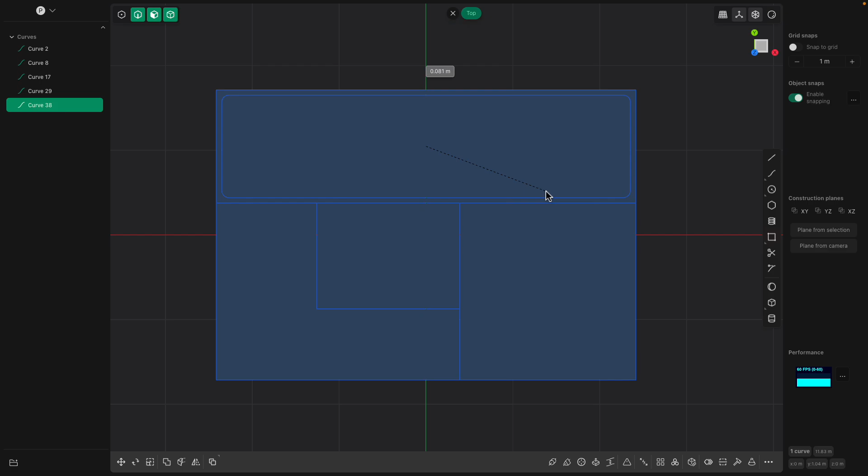For now anyway, select the face. The next thing, the procedure I like to do is usually just O to inset, and then B to bevel. There are many ways to do this, but I think this O and then B for bevel is probably the best way to do it.

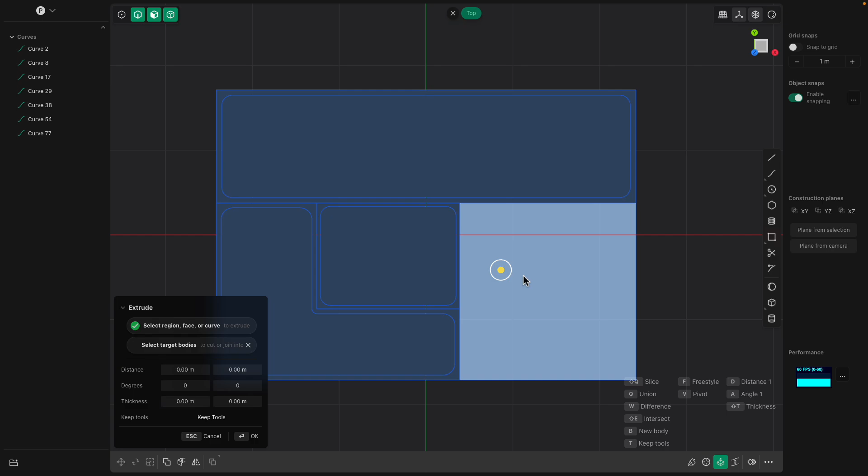There are probably different procedures, but let's try with this for now. So inset and then B for bevel. You can be precise with the bevel to make sure every bevel is the same, but in this case don't worry too much about it - it's just for fun.

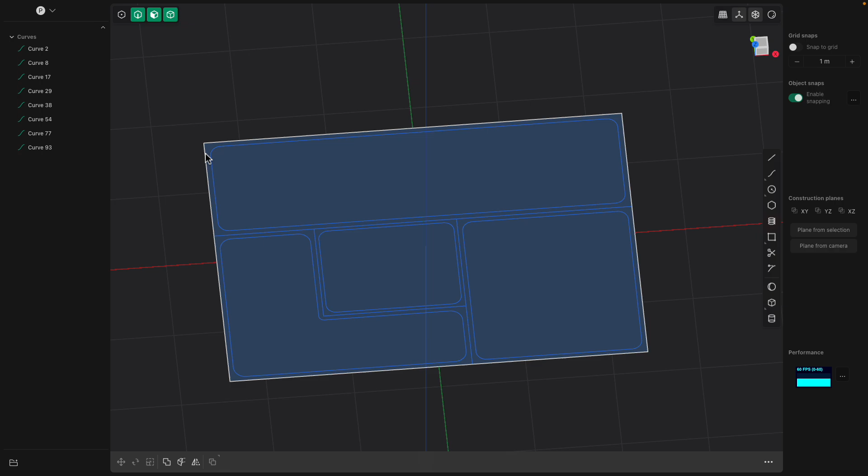I want to show you the procedure because this is kind of like a pretty good therapy - you're thinking of a space and you divide it like a room or like manga panels, and now you have this divider, and you can do funny things with it.

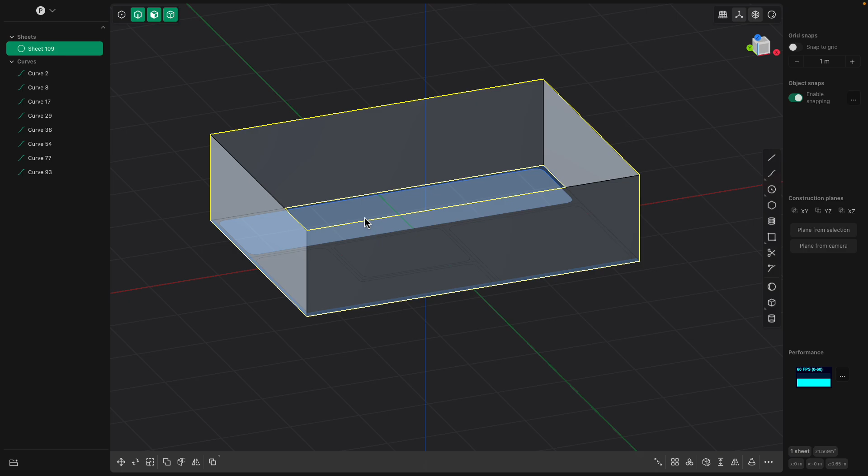You start with this one, the big one, right? Let's do an extrusion, very basic. Now we are creating like a wall, a divider, a safe space for our bento. And this guy is just a sheet - it's nothing, just like a surface.

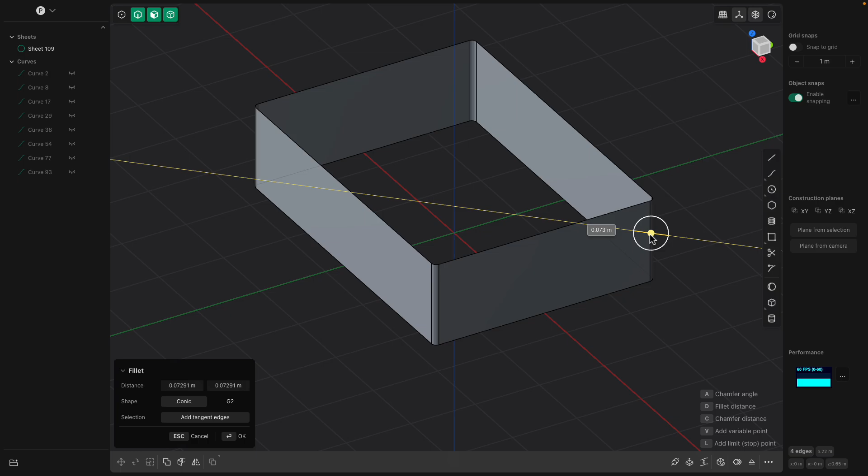That is hollow. So the next thing you want to do probably is make a rounded corner. Not too much, just a little bit, so it looks nice.

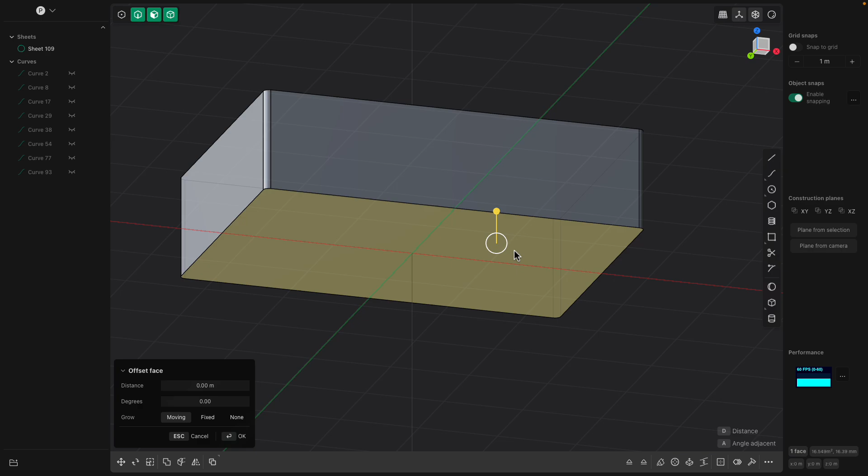And then select the bottom part using option, select, patch the hole, right click. Now it's still a surface. Let's do Control 2, and then you can round this bottom area. Save. It's still not a solid object, so you want to turn off the X-ray.

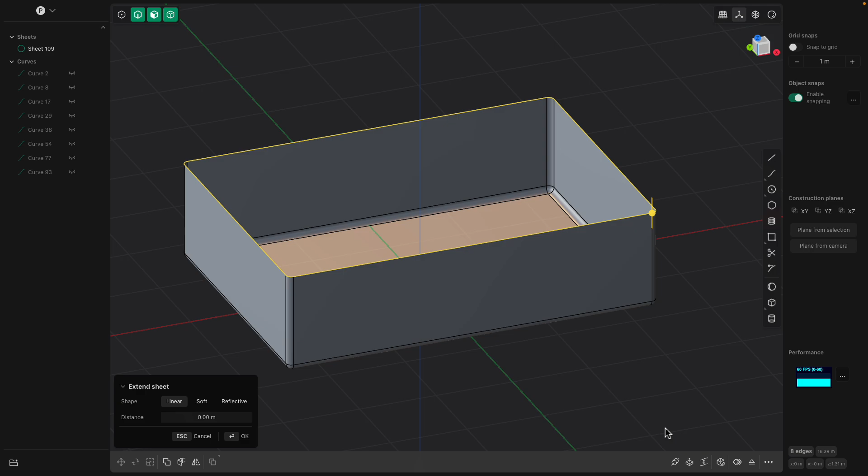I want to select the top part, option click, patch the hole. Now it becomes - the sheet becomes solid. Okay, magically it becomes like that.

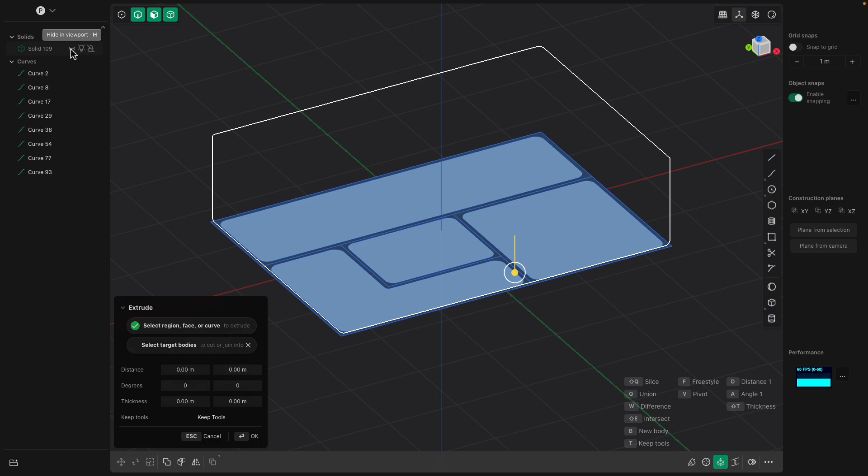Now let's refill all the outlines again. Let's hide the solid object bento. You know what I'm trying to do? We're gonna extrude this. In this case we're gonna make a cut.

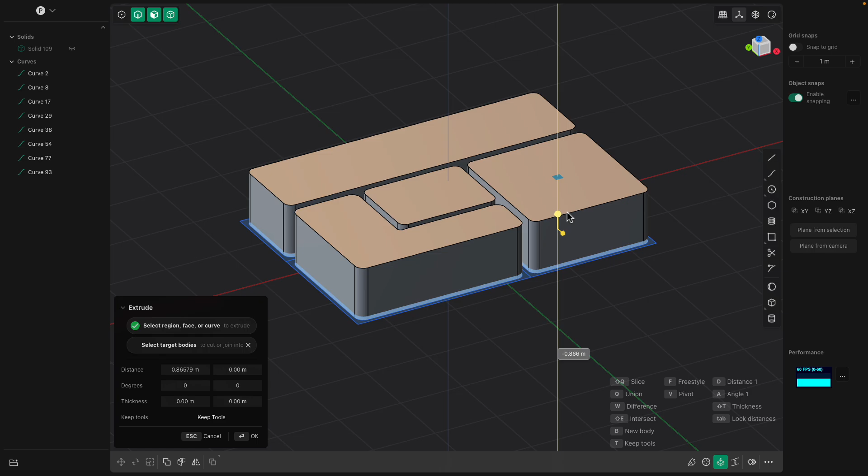Let's just extrude it up for now, and it's gonna be a cutter, so let's delete or hide all the curves. We can keep all the curves. Now we have this bento box and all these cutter objects. So let's adjust this.

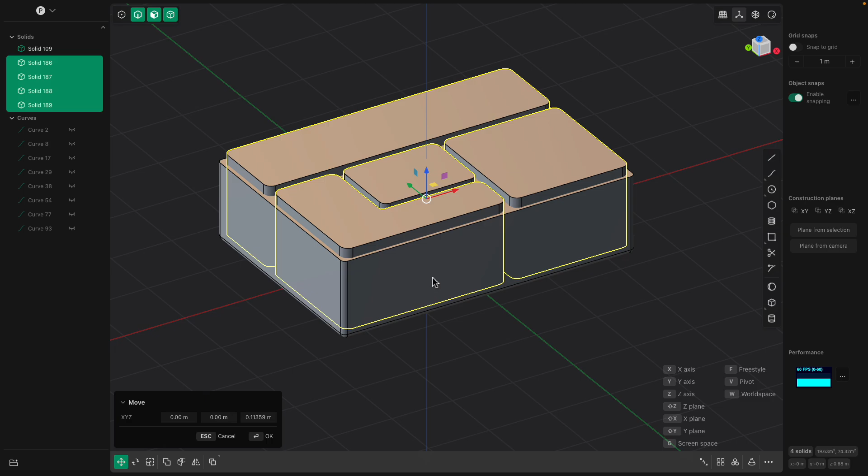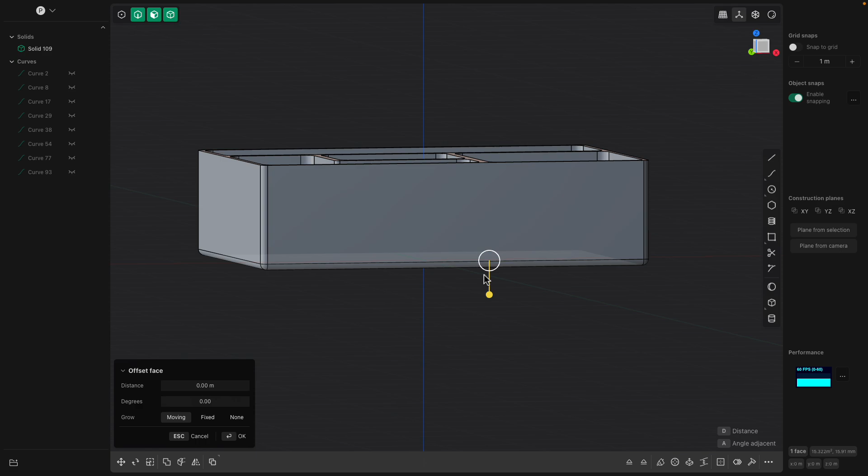Select the big one, select one of this guy, and then Q, and then shift click. So this process seems like a procedure - it's very precise, kind of, right? But it's kind of nice to be able to do this actually. There's a bit of precision, but also you have freedom when you make a cut.

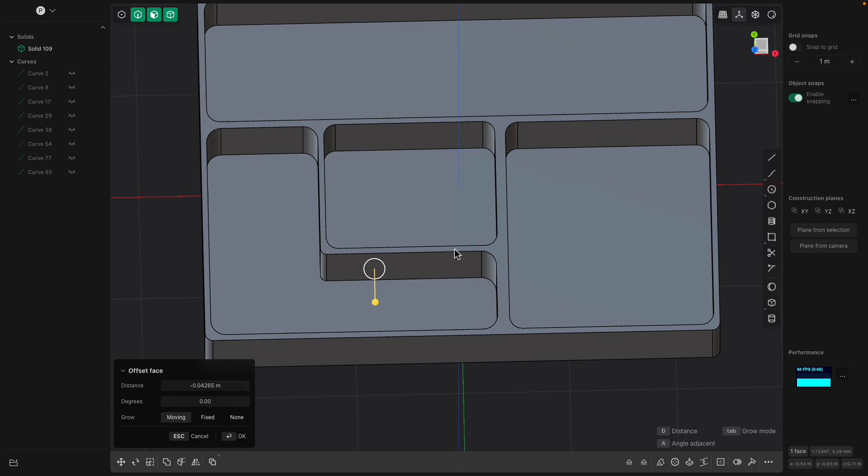And now, if you're unhappy with the thickness, you can push and pull. So this part is almost like a design project, right? Okay, it's kind of nice.

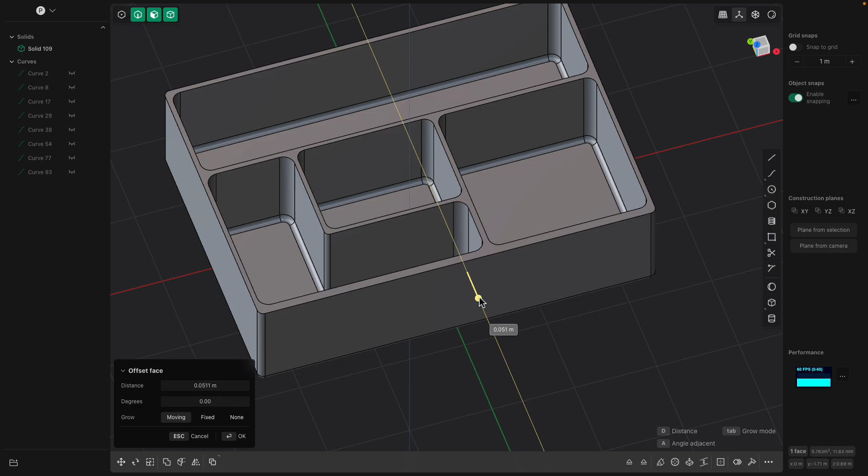Select all the bottom part and then Control 2, make it rounded. That's nice. You might want to round some areas. In this case, I don't know - I like the outer part actually a little bit thicker, so we can still do that.

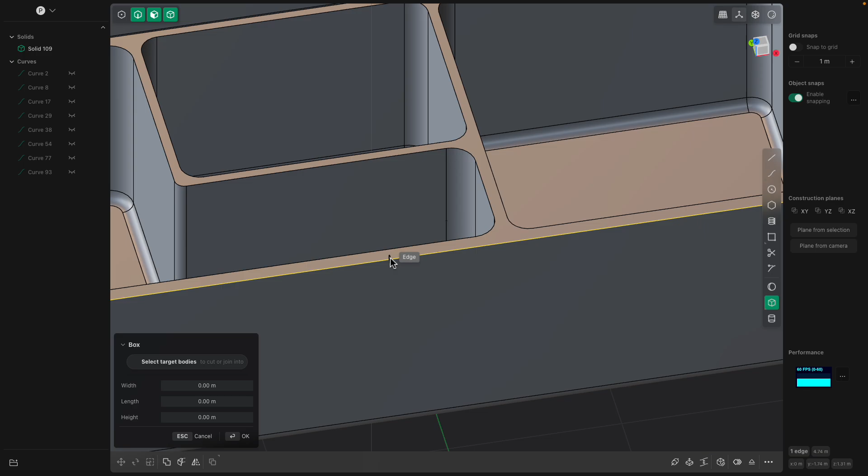Yeah, I think if we want to make the top lid and then we want to make a cut just so we can open the lid, we can actually do that as well. Let's try.

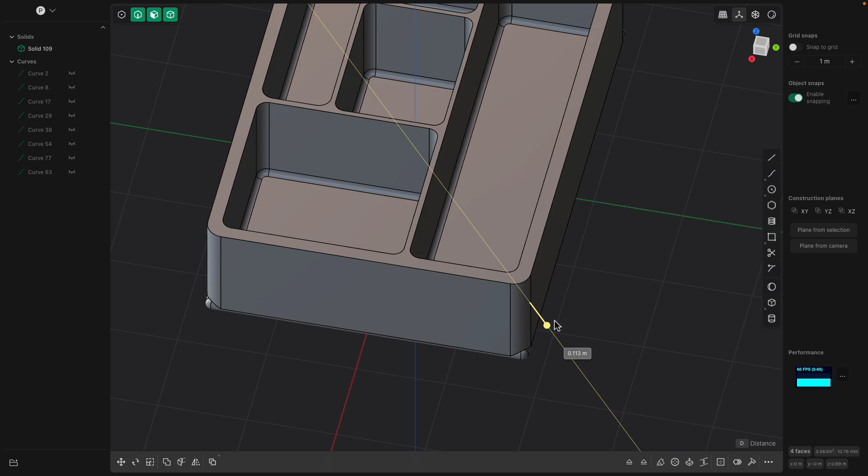So this gets a bit thicker. So we can still have a bit of control, some procedural control. Okay, this part is a bit broken because the bottom part is now like a different entity, sort of.

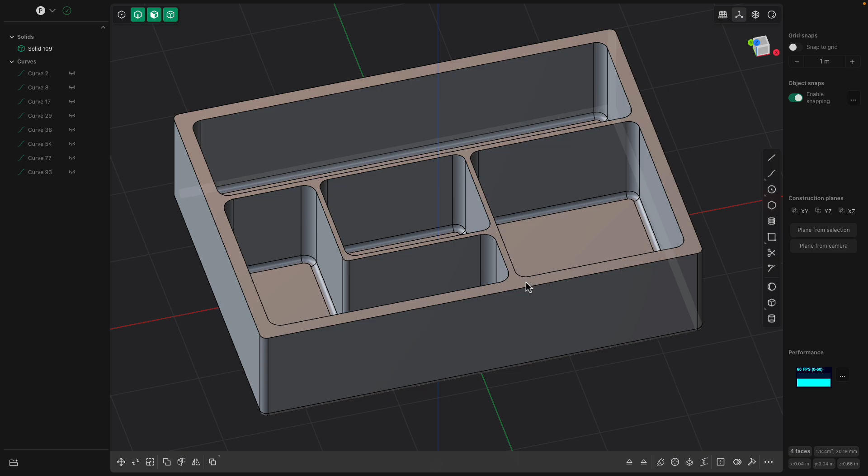Anyhow, what I was talking about is that if you make the top part, it's gonna duplicate the top area. Now we have this curve, and with this curve we can extrude, right? So we have the lid.

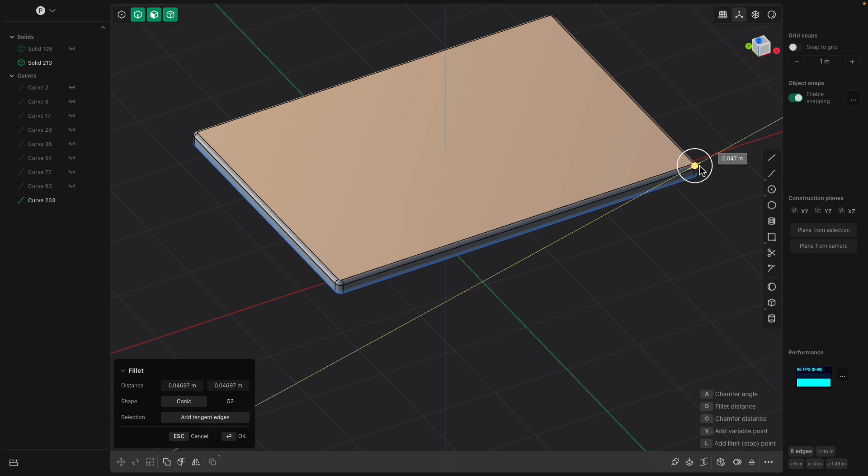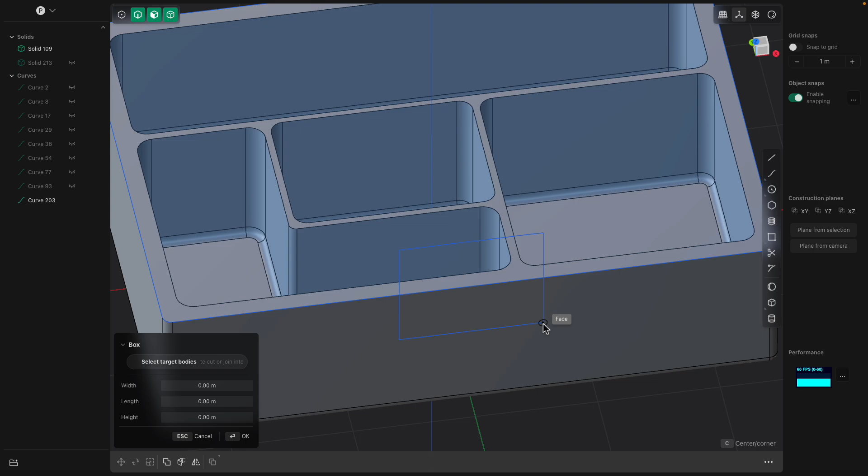Just for experiment, it's gonna be the lid. We want to be able to open the lid, so we need to have a cut, just like the AirPod design the other day. It needs to have that cut in the middle. Type C. This kind of thing.

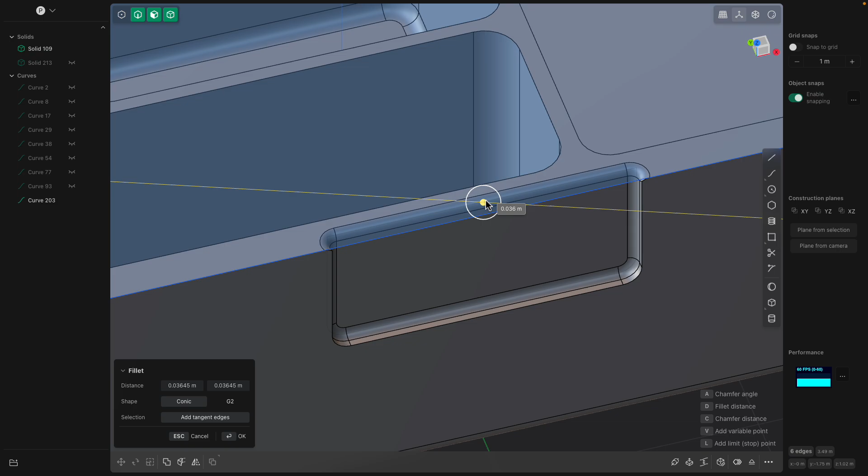Maybe the top part also needs to have the same similar cut, so we can, but at least we can just pull this with our finger to open up the bento.

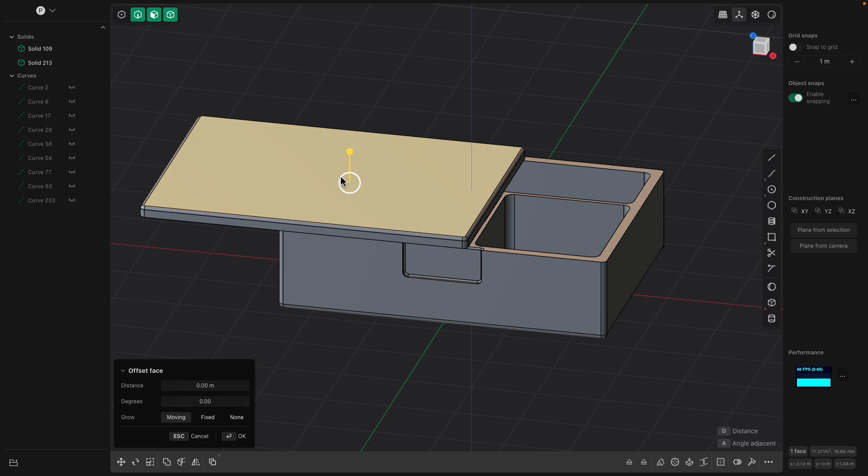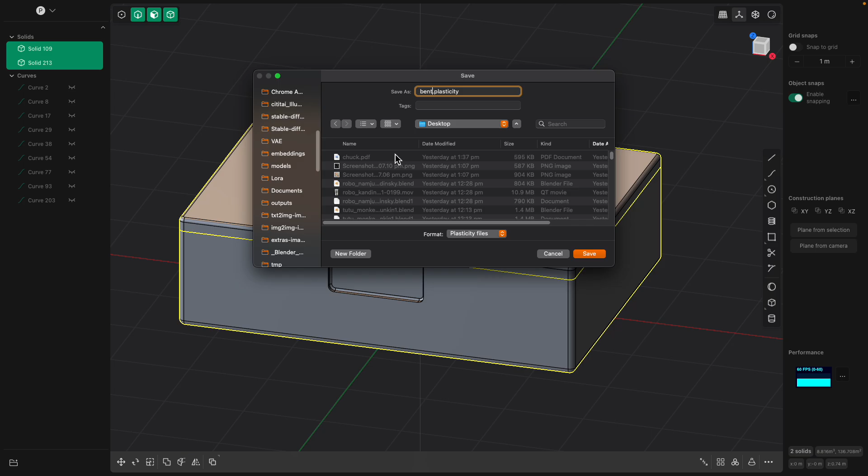Now let's see, I guess we can maybe just bring this into Blender and then do something more about it. File, select all the solid, file, save as, Bento Box. It's not a bento yet because it doesn't have the inside. Let's do an n-gon, doesn't matter in this case.

Open up Blender, file, import obj desktop Bento Box. We always need to rotate it minus 90 degrees in the X direction.

Save. You want to turn this bento into a render bento box with something inside it, right? So this is the lid. No. Probably.

Arrange this a little bit, kind of like a teaser or something. Let's try something. Let's make 512 by 768. Okay, actually 768 by 512, and we need to have our camera.